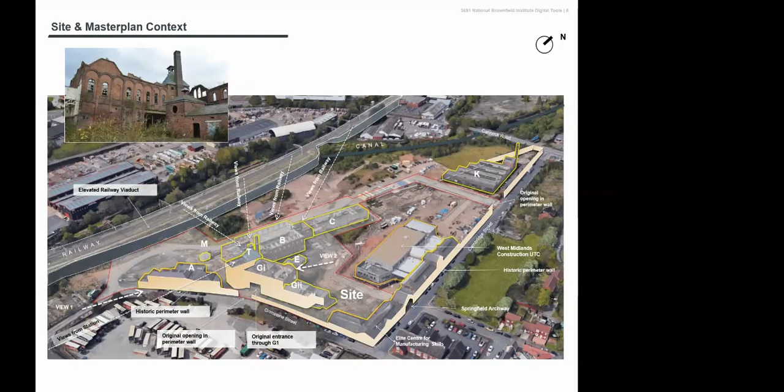Some attempts at redevelopment of the site prior to the university purchasing it had also created some issues which we had to overcome and manage. But this is the next phase in the development of the site overall by the university. There was the University Technical College on site, the ECMS - the Engineering Centre for Manufacturing Skills - which was one of the previous schemes that reused the stable blocks, and then we've got the Elite Centre for Manufacturing Skills, and then the School of Architecture and the Built Environment was the latest project to kick off prior to the NBI.

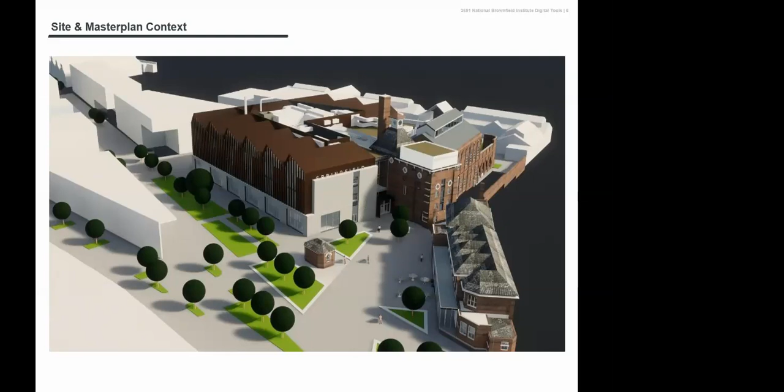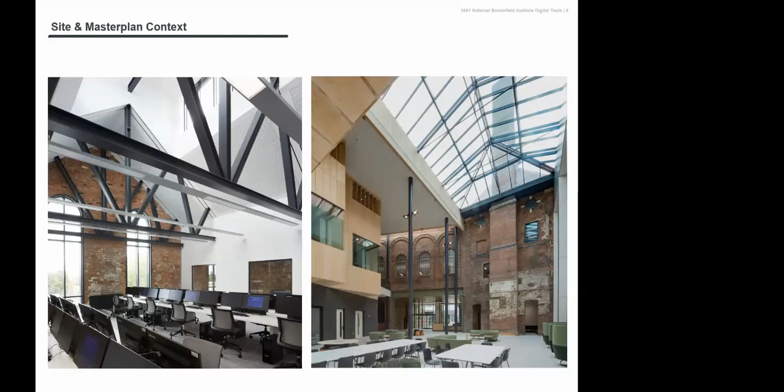The team got very familiar with the site and the constraints therein, having delivered the School of Architecture, which is immediately adjacent to the NBI site. From that came the reality of the school, breathing new life into those existing buildings, which are a landmark within Wolverhampton. We needed to make sure we were celebrating the existing buildings and the historic content of the site.

In considering the NBI building in its own right and the site selection for it, we had to make sure we were tying into the overall master plan, and the site was chosen to reflect and respect the previous historic line. There were old railway sidings that used to pass through the site, one of the focal points within the site master plan, maintaining that central corridor where the railway lines went and utilising the space on either side of that for the developments.

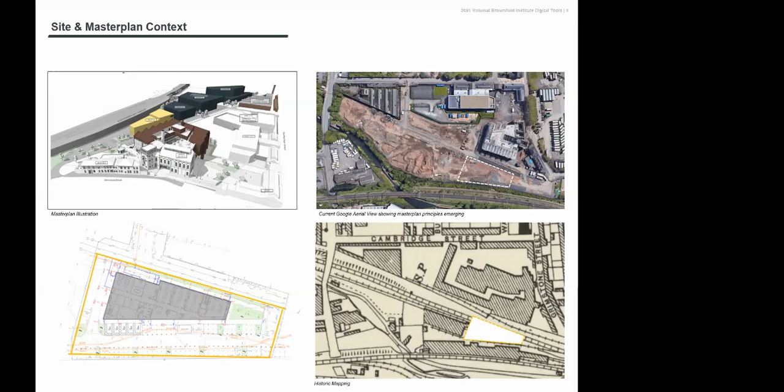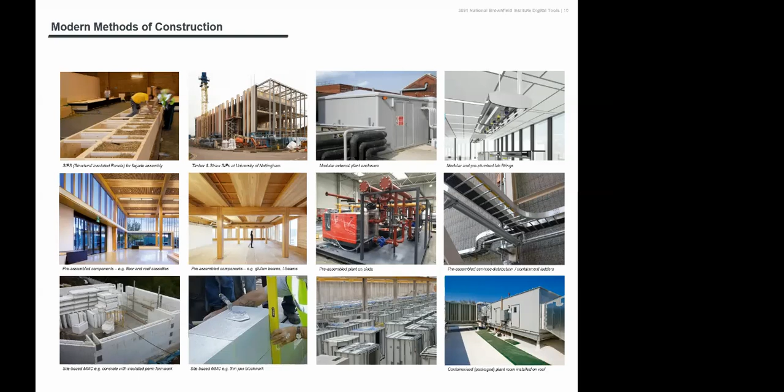As part of the brief, one of the key aspects we were looking at was the incorporation of modern methods of construction. In such an accelerated program, there was only so many things we could consider, but we tried to ensure we picked up all possible avenues for modern methods of construction, componentized construction, and to make sure we had a sustainable delivery process in place.

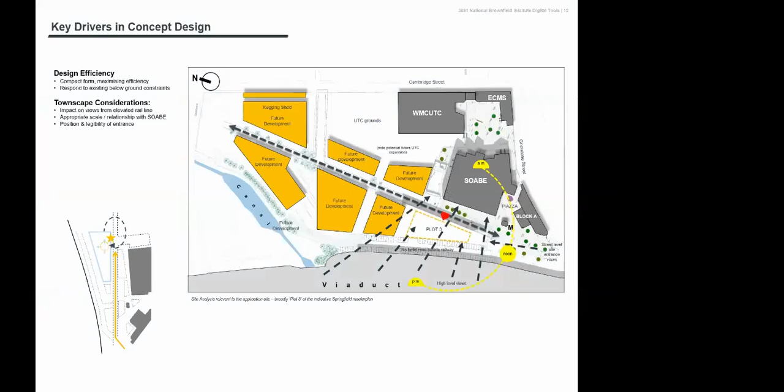I'll now hand you over to Joe, who will be able to talk you through some of the plot developments in terms of how the scheme developed from that point onwards. Thank you, Simon. Good afternoon everybody, I'm Joe Belcher from Associated Architects. It's really good to be able to join you today.

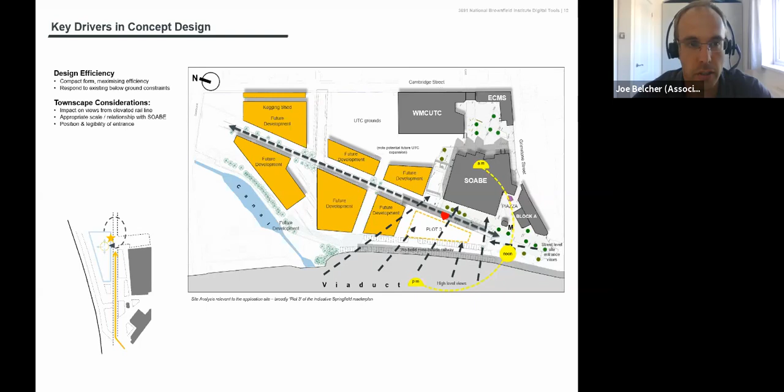So the key drivers in the concept design were really twofold. There's a big emphasis on design efficiency, delivered through a compact building form, maximising the usable space for the budget, in terms of below ground constraints, and then also townscape issues of how to deliver a building in close proximity to the historic context.

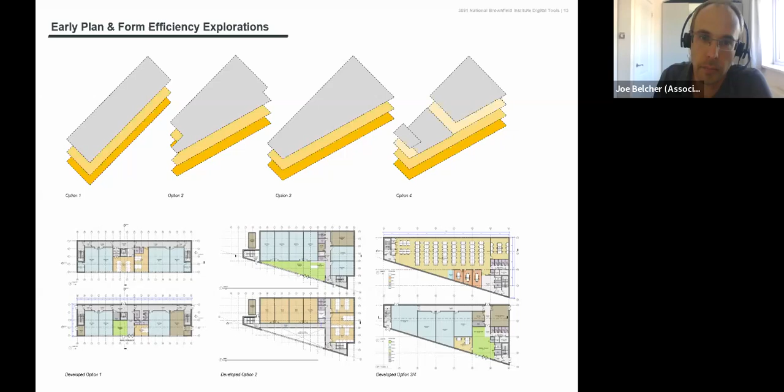We delivered a quick but wide-ranging options appraisal, different plan forms, considering volumetric modular approaches and different footprints to the site using the 3D models available, as you can see here, and settled on a wedge form construction. If you just flip the next slide, Simon, that'd be great.

All the way through that process, we were able to use the models to undertake real-time analysis of the impacts of each of those on the net areas available and compare that to briefing requirements.

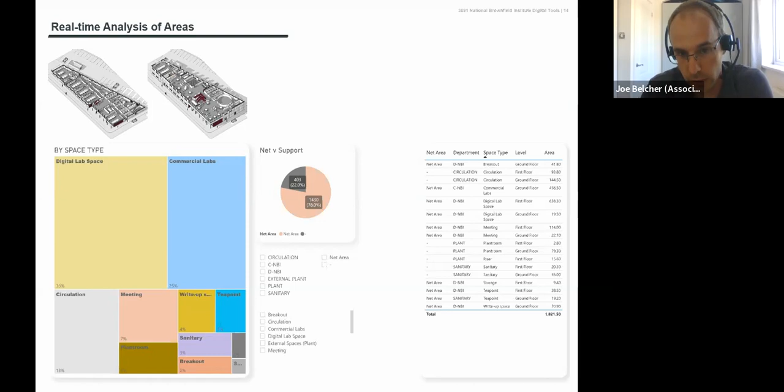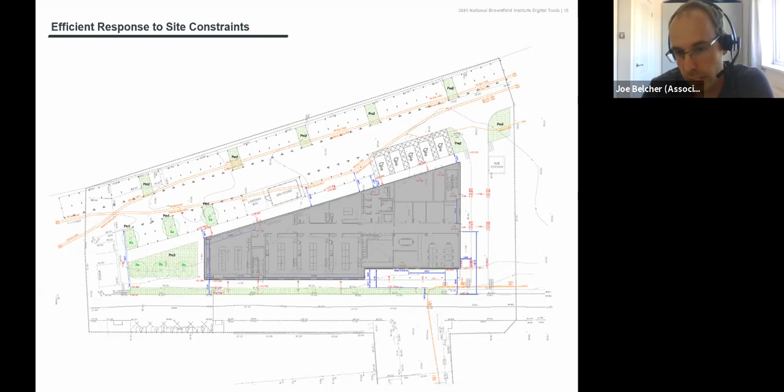As I mentioned, it was really key that there was an efficient response to the below ground constraints. Simon mentioned some of those issues. There'd been a remediation process undertaken already, so we were keen to minimise removal of material from the site, and also there's a number of HV cables as well as other LV and data cables on the site. So the development of the plot and its levels was all driven by that.

We were able to test a number of townscape concerns, the views from the railway viaduct adjacent to the site, and also the relationship with the SOAB building, shown on the bottom right hand side with the sawtooth roof that we'd recently completed.

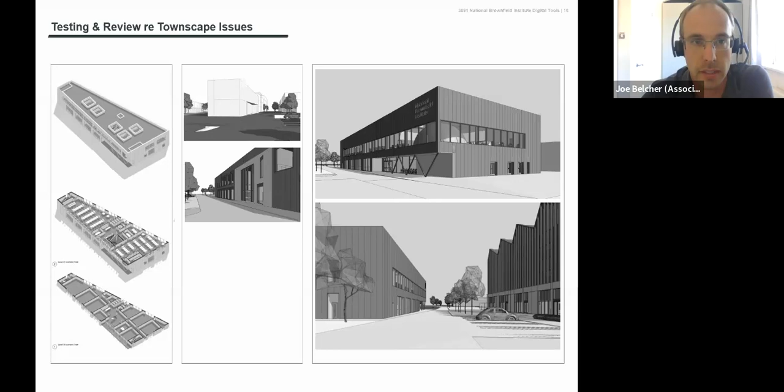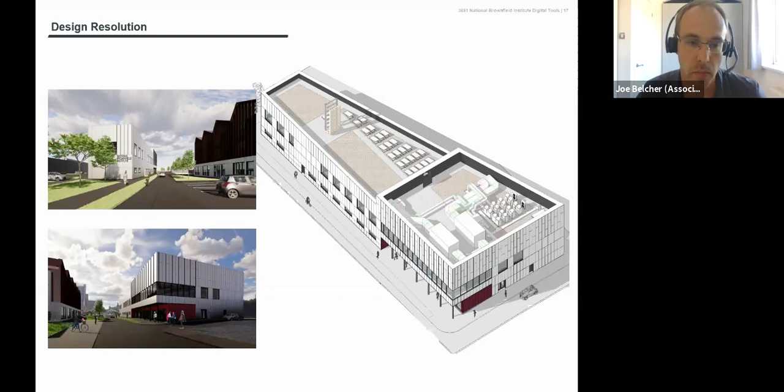So here you can see the design resolution, really how it has ended up. It's a relatively simple form, a wedge shape, two-story building with a protruding section at the far northern end, which accommodates a plant screened area and also helps to emphasize the entrance end of the building, helping to draw people further into the master plan site as it gets developed through the future.

Using all the digital design tools available to us has been really important to enable collaboration amongst the whole design team to get us to work to this aggressive delivery program that Simon alluded to. And it's really important to mention that the key to all of this is healthy models, reliable models producing reliable design information.

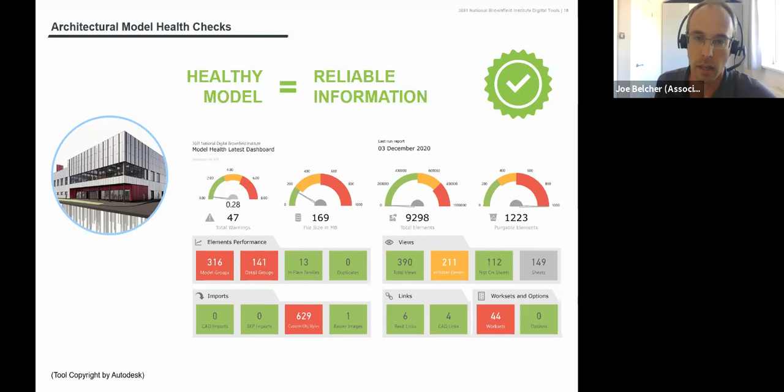So we conduct regular model health checks. We're serving as architects, lead designers, and BIM lead coordinators in this project. So it's been great to work together as a team on this.

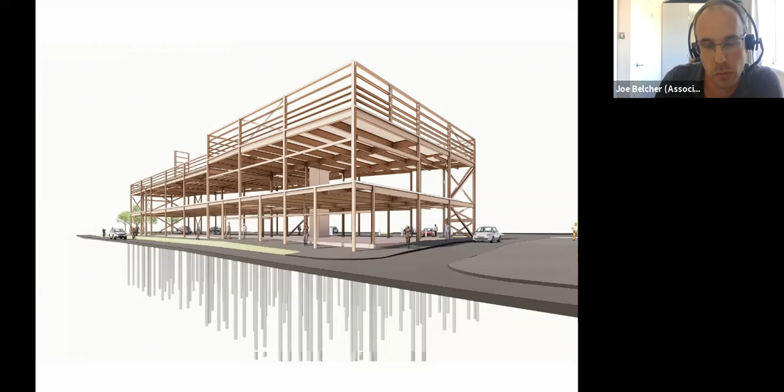This is kind of what we began as a core design team with landscape, civil structures, and ourselves, and MEP has now been progressed through the site delivery stage.

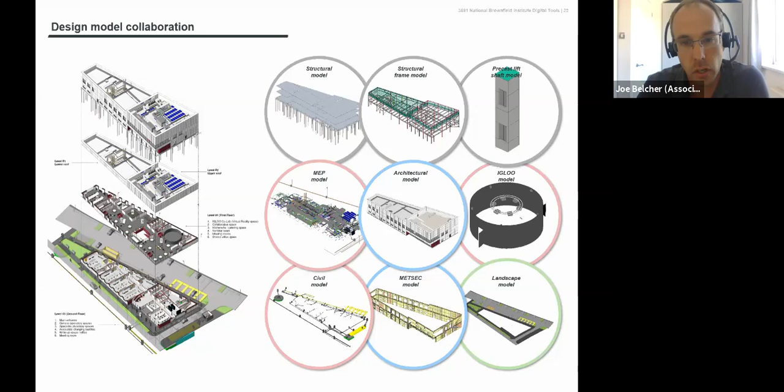We're now a few months into site stage work, and we're integrating the models of specialist subcontractors, for example the steel frame, light steel frame SFS systems, and structural staircases and the like.

So it's a process which is continuing, and that's really important to ensure that all the advantages generated early on are maintained in terms of coordination and smooth delivery on site. We're using a tool called BIM Collab to enable collaborative review and recording and addressing of coordination issues, illustrated in this slide as a sort of thumbnail summary.

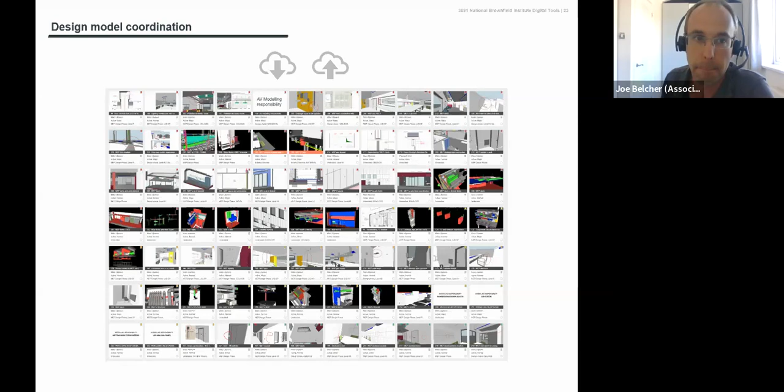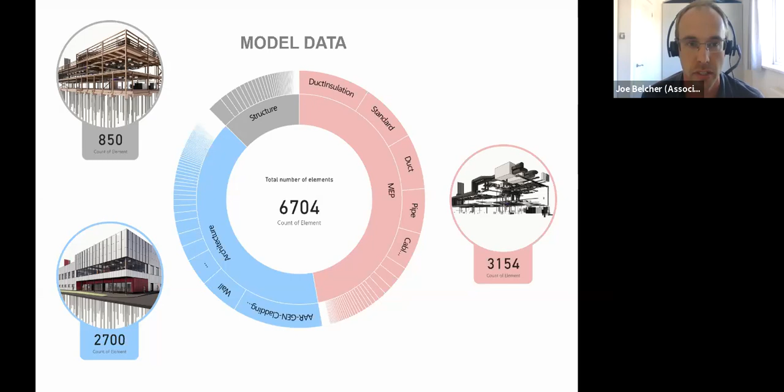So there you see this, the complexity of the various models. That's just the three main models from the core design team at an earlier stage of the process.

So external envelope, as I mentioned, is an aluminium rain screen cladding system, which we developed to meet all the requirements for cost and appearance on the site. It's a generally silver appearance with some feature areas in a deep red wine kind of colour, picking up on existing textures and colours on the site.

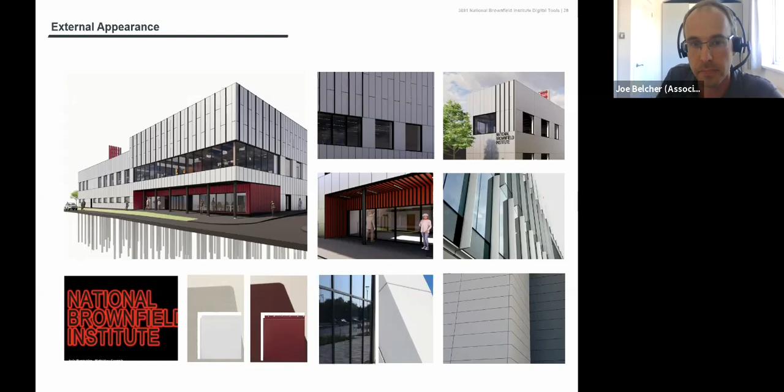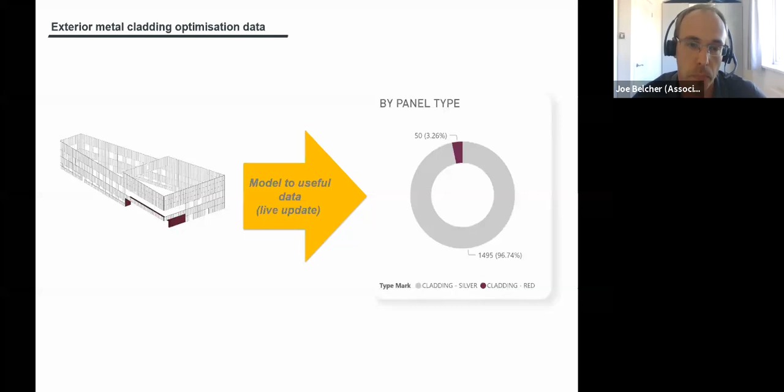And obviously, as well as traditional 2D outputs from the model, behind that there was a lot of extensive use of the model. If you see on the next slide, Simon, where we could do processes optimizing cladding panels, for instance.

So here you can see we ran some simple analysis saying, well, you can see that we've really driven it down across the whole cladding panel system. The vast majority of them, 75%, are the same width, 750mm modules. Very few deviate from that, at corners and the like. So we can use the model to really drive design optimization, demonstrated by this example.

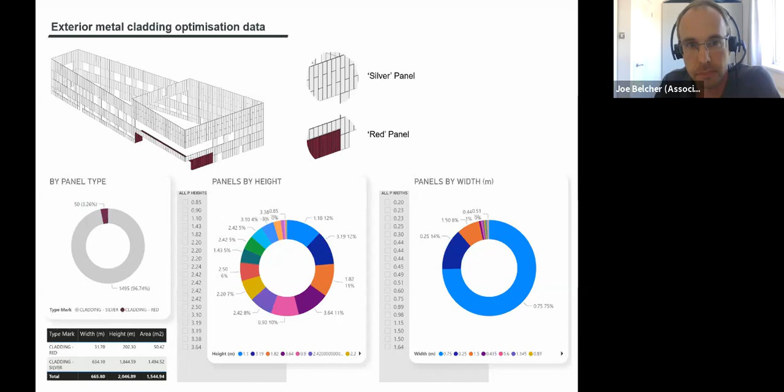Next one. Next slide, please. There we go.

And a similar process was undertaken through optimization of the glazing on the building as well. It was a clear client directive to really focus the glazing areas, and we were able to demonstrate the processes we were going through in iterations of the design, using the model to generate quick and accurate estimates of that.

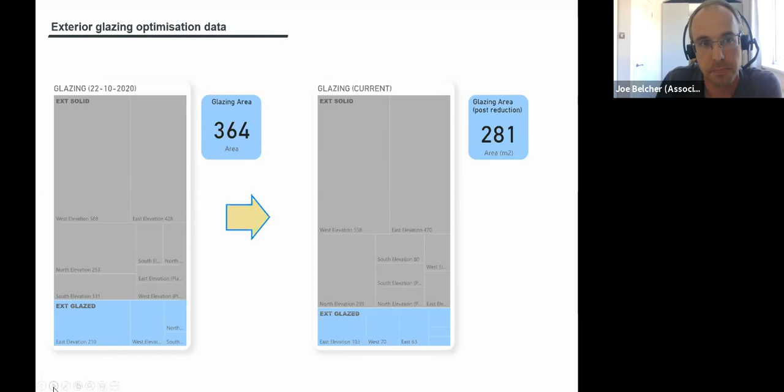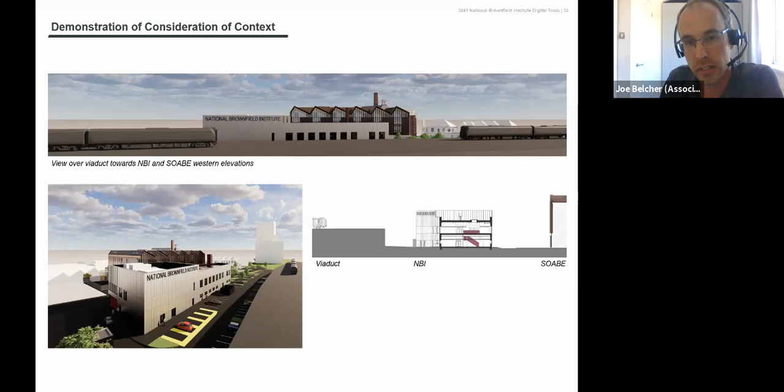So here you can see some demonstrations we produced of the scale and how it relates, the views from the viaduct, and the relationship with that sawtooth roof of the SOABE building recently completed. Okay, if we just flick through these.

So moving to the internal arrangement, as I mentioned, it's a simple two-storey building. You can see the plant on the roof to the right-hand side there. And the ground floor, I'm going to talk through first.

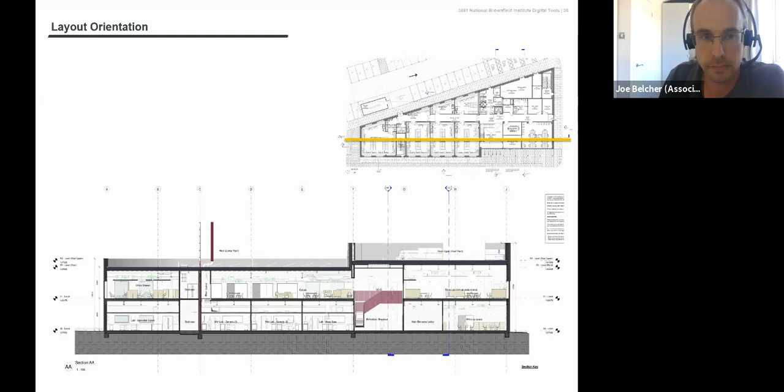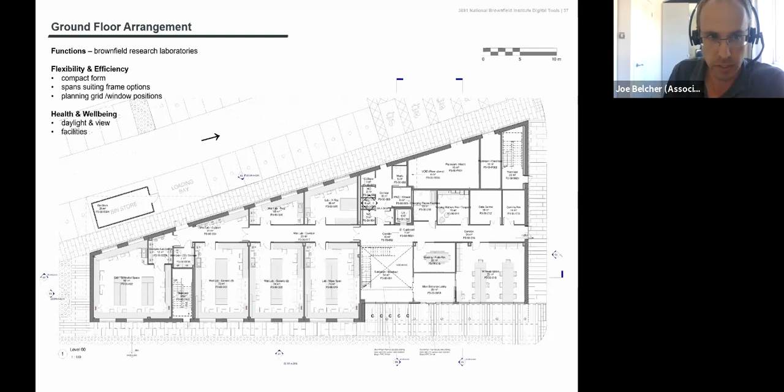The labs are all clustered in an efficient group together at the top end of the page there. The entrance towards the middle, and some admin areas right up on the front corner, with core and plant areas, data center, etc., tucked in the corner there as well.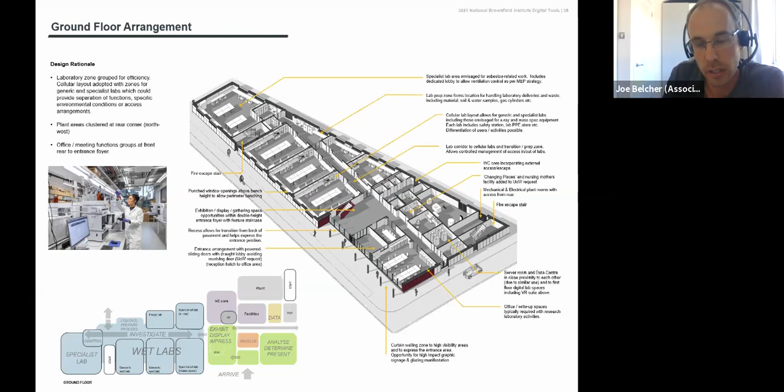So within the laboratory zone, the requirement is a space available for external commercial partners to come and take space, or to collaborate with the university on research into issues related to brownfield sites and contamination of various kinds. So there are different labs intended to focus on different types of contamination and site issues, such as asbestos or various organic materials, metals, and others.

And there's a range of prep spaces there. So it's a cellular arrangement rather than open plan, which supports various alternative uses of the spaces by different users for different functions, adaptations over time, and specialist environmental conditions in particular labs, which wouldn't be available if it was a single open plan space.

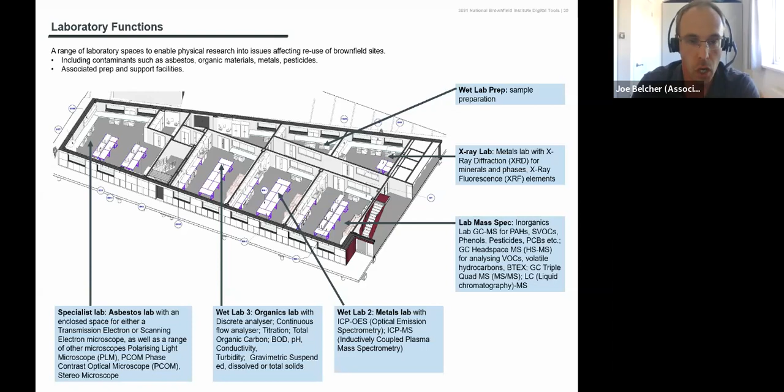So the next few slides just take us through some simple visuals to give you a flavour of the spaces available. Oops, there we go.

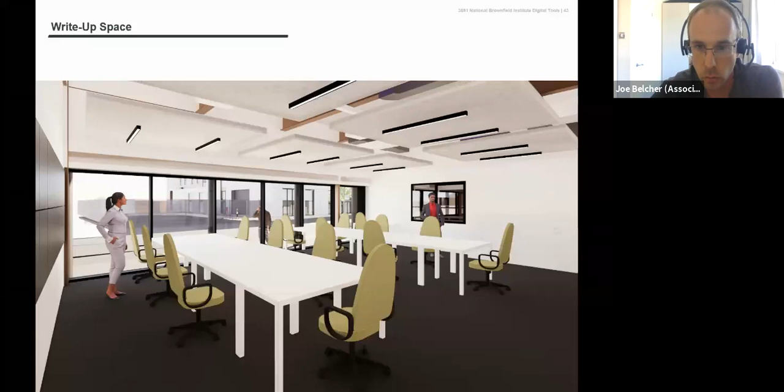This is a write-up office that's associated with the laboratory spaces, and an office area, meeting room.

Very early on, we developed ourselves a laboratory fit-out model. So it's all considered from an early stage, which really helped the client to understand what it is that we're proposing, what they're getting, and refine that, and also deliver really accurate tender information that could be accurately priced.

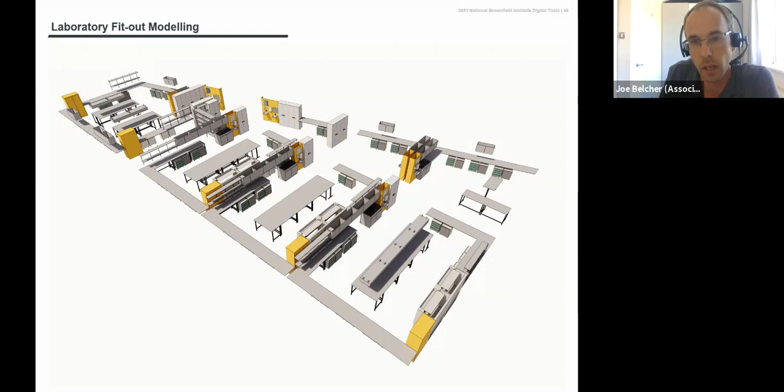And you'll see the schedules linked to NBS and all the rest that we have on the next couple of pages. And here demonstrate the coordination between the structure, the fabric, and the services, which is really crucial on these heavily serviced lab areas.

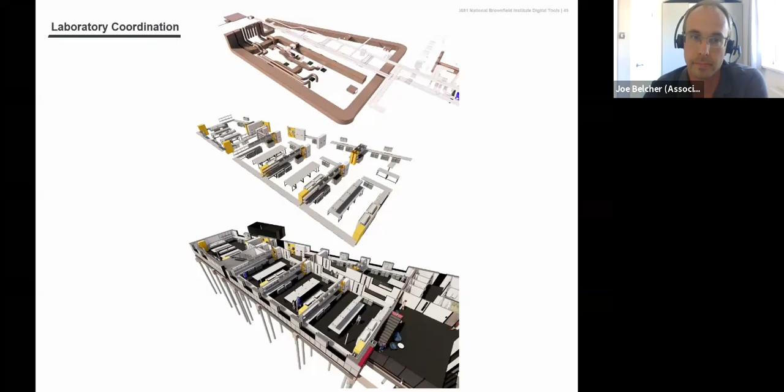So the 3D model, the layouts, the quantities, the specification, all linked together through the 3D model. Likewise we can optimize the design and keep a clear track on the data, the quantities of various kinds of provision, worktop areas and stuff like that, through the iterations of the design.

Just to reinforce as well, Joe, obviously we'd been driven specifically to get early contractor engagement on here to be able to deliver the project in the timescales and time frame we had. And obviously it was really important to get their buy-in and support in making sure we provided the right sort of information in the right format for them, and to get the support of their supply chain through this as well. Yeah, that's right. Thank you, Simon.

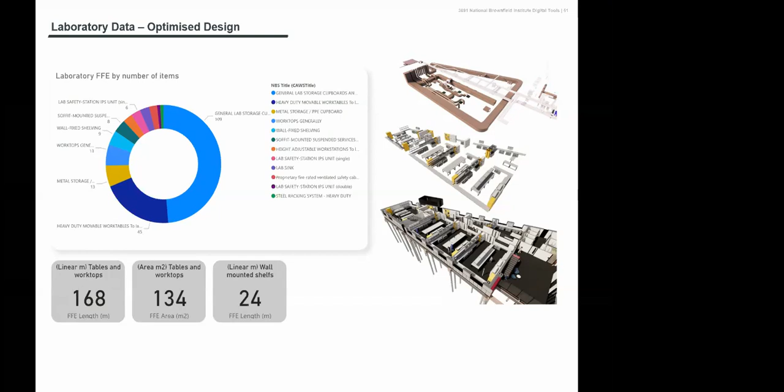Yeah. Okay, next slide, please.

Okay, so we're going to move up to the first floor now. And the function of this space is really a digitally enabled collaborative work area. The university intend to run professional training events, CPDs and that kind of thing, but also for the space to be used by project teams to be able to come and plan and develop their project proposals for the reuse of brownfield sites.

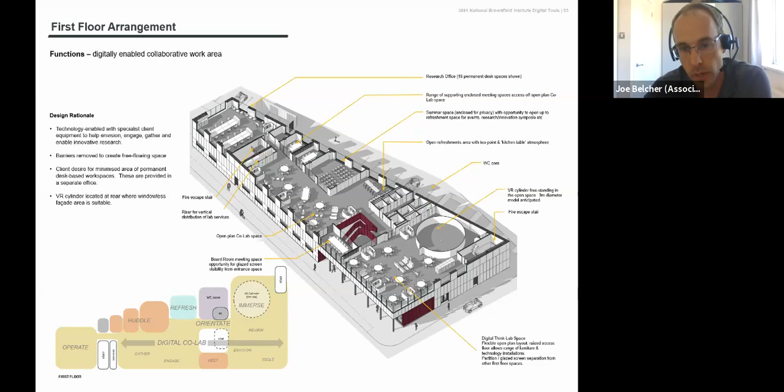So it's very technology enabled through its fit out, and a key flagship element is this 360-degree immersive cylinder, where there's projection on all sides, which we'll see in some later slides, where project teams could come and view and review various sites linked with various below ground survey data, record information of contamination, of below ground conditions.

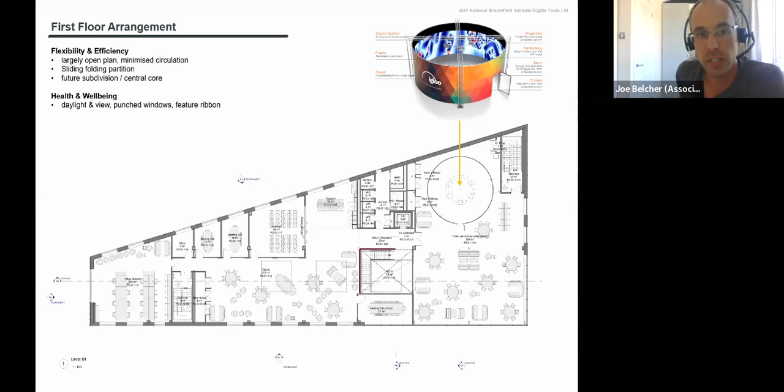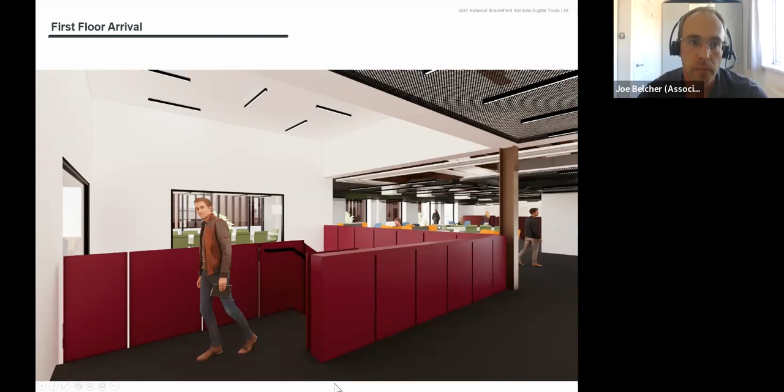Various issues related to constraints really that may have held back brownfield redevelopment previously. The idea is that within this space, in a suite of spaces, new solutions and development opportunities will be unlocked. So flexibility and efficiency, again, key things, health and well-being in terms of daylight and views. So the next few slides again show some visuals of the kind of space.

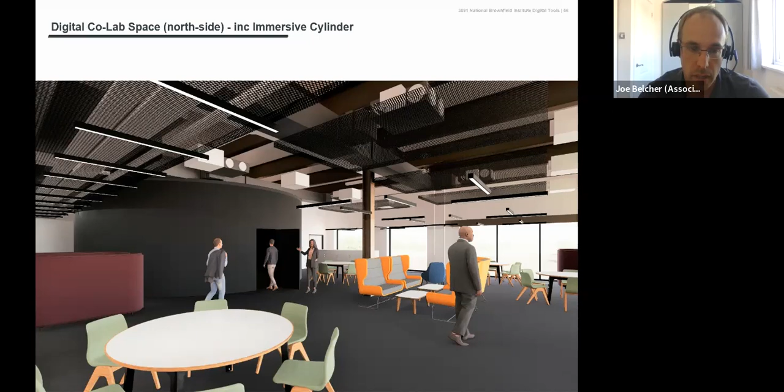This is the arrival up from the ground floor, and this is the 3D 360-degree immersive cylinder externally sitting within the space, and the kind of facility that might be on the inside. Obviously any number of things could be projected on those surfaces, combining data and visual imagery.

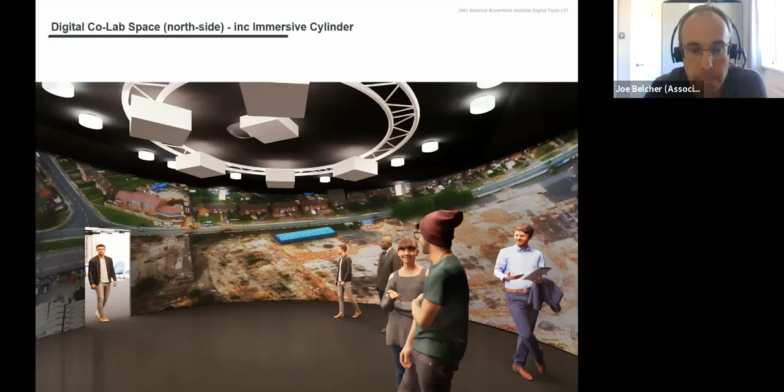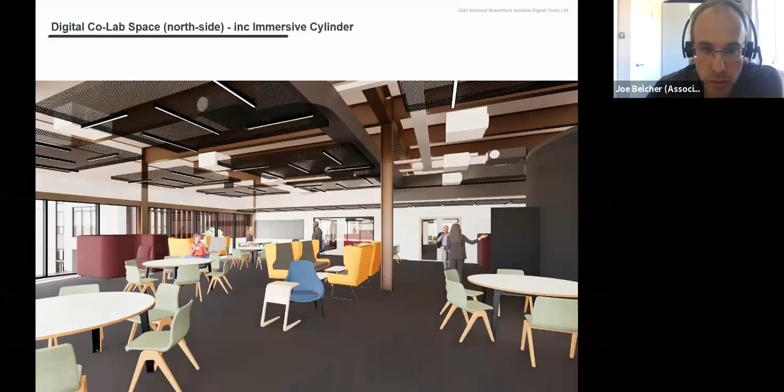So outside of that space are the wider sort of collaborative spaces, where breakout opportunities from that main internal cylinder would take place. And over the other side of the building, there is a tea point refreshments area and further open plan breakout spaces.

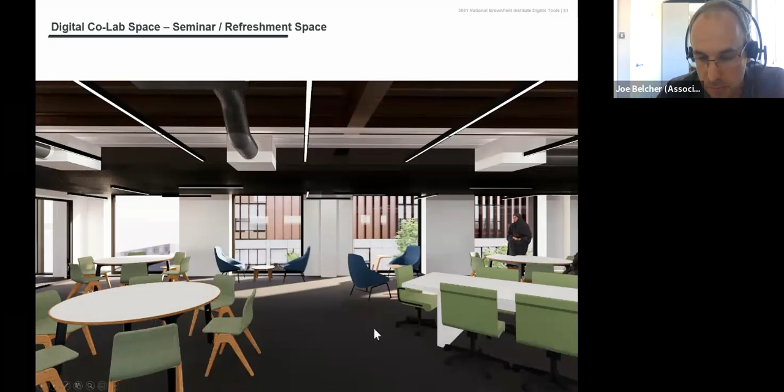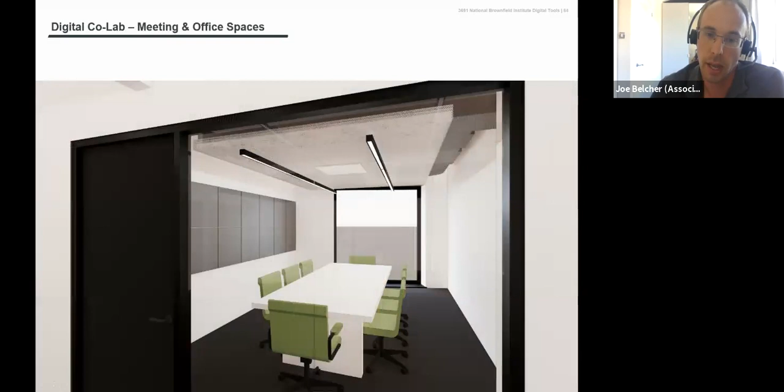Lots of flexibility in how these are used. There's a kind of boardroom style meeting room, a range of seminar spaces, meeting rooms, and also an office for the regular workers within the space as well.

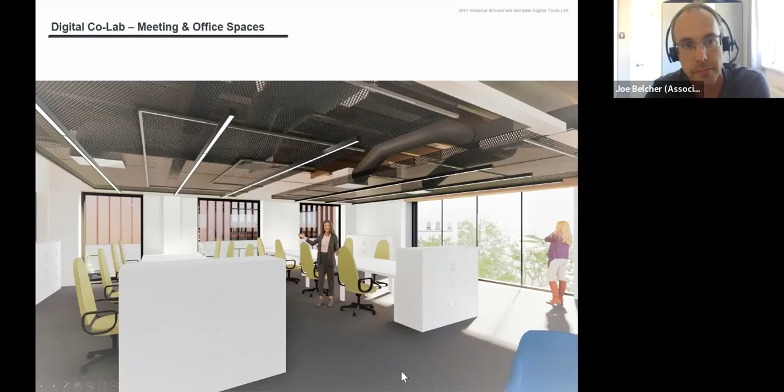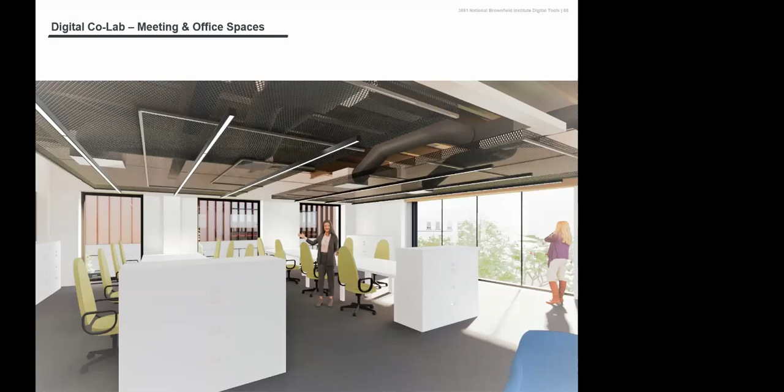Yeah, I mean, the key focus for this was around, again, collaboration. It's allowing bookable space for the wider community as well as the university to use. So any visiting professors, any visiting researchers. So the whole space was driven around having flexibility and collaboration at its heart.

So sorry about the interruptions. I have to quickly take myself off mute to be able to interject. No, that's good. Back to yourself. Okay.

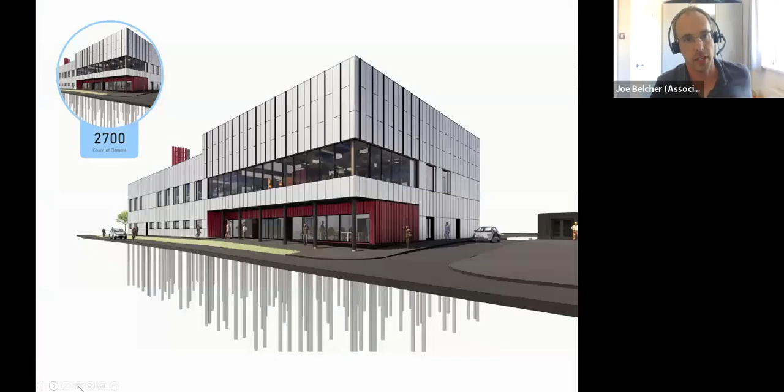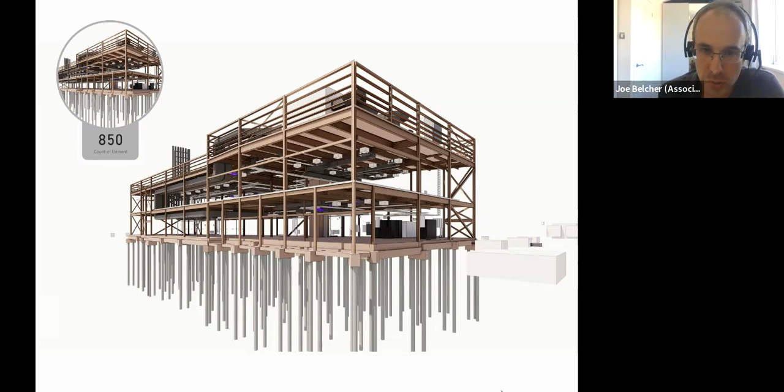Okay, so next few slides just demonstrate, as you've probably got a flavour of, the holistic approach we're able to take to architecture, structure and services. So here's the architectural wrap to the building, sort of 2,700 components within the model at that point. The structural frame and piling is 850 elements within that model at that particular point in time.

You see the piles there, and next you see the services, obviously very heavy on the modelled elements there with the complexity of the MEP systems. And then all together. So I'm going to hand over to Dan Maddy from Atkins to talk through the structural and civils approach to the scheme.

Yeah, thanks, Joe. Hi, everybody. My name's Dan Maddy. I'm from Atkins. I'm a structural engineer, and I led the civil and structural design on the NBI project. So I'll just talk for a couple of minutes about our general approach.

As you can see from the slide, structurally it was quite a straightforward structure, but we really spent a lot of time and focus on optimizing it. And due to the aggressive programme, it was all about coordination and collaboration and getting the design completed as quickly as and efficiently as possible. So yeah, just a few minutes talking about the civils to begin with.

So if you go on to the next slide, please, Simon, or whoever's driving. So we started off with the drainage. So the slide before this one, please. It's got the surface modelled. Yeah, there you go.

So we modelled the drainage at an early stage to make sure that was in line with the existing site-wide infrastructure that was installed as part of the master plan. A lot of the site-wide drainage and attenuation was already in, and we had to tie into that.

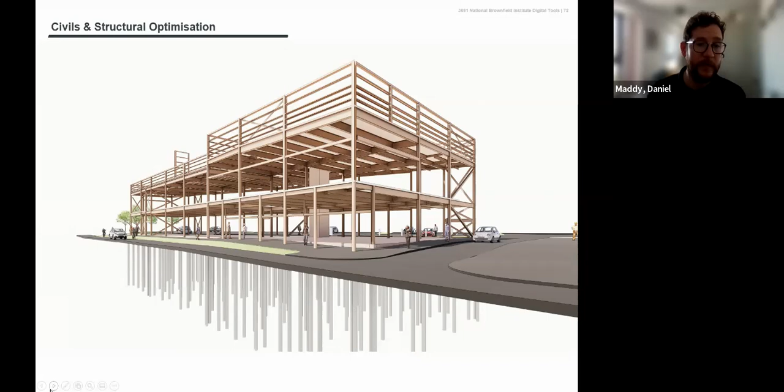We've got some SUDS elements on the scheme. We've got permeable paving in the car park, which provides some water treatment and further reduces the need for attenuation tanks. Another advantage was that it reduced the amount of dig required in the car park, where we've got the high voltage cables that Joe mentioned earlier. So yeah, that's about it on the civils.

Moving on to the structures, again modelled in 3D. With the surfacing, this allowed us to really optimize the level of the pile caps and substructure. As you can see in this model, the pile caps and ground beams aren't all at the same level. We've really responded to the proposed external levels to minimize the amount of excavation and minimize the amount of sacrificial additional piles and the trimming of the piles.

We've got two different piling mats to really optimize the amount of imported and exported material on the site. In terms of the superstructure, as Simon mentioned earlier, one of the huge factors on this project was the very aggressive programme and getting to site as quickly as possible to meet various funding targets, and that had a large impact on the structural solution.

There was a large appetite early on to investigate and showcase modern methods of construction, such as modular, which we looked into quite a lot. But we were also conscious as a design team that we didn't want to crowbar those solutions in just for the sake of it. We wanted to take a pragmatic approach, as we would on any brownfield project, and use the most appropriate solution. With all projects being different, on this project, programme was king.

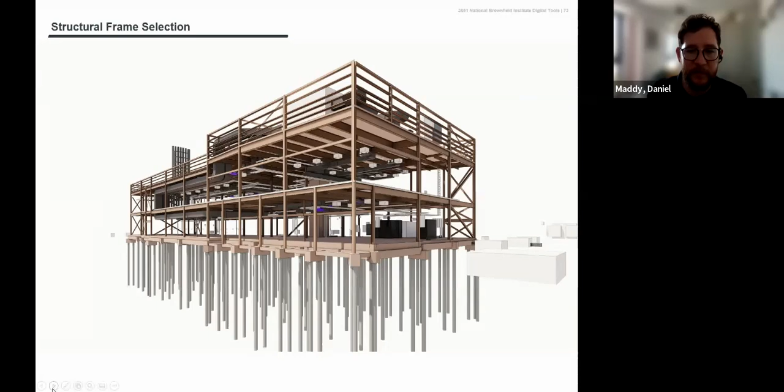In terms of the floor construction, that was really developed to suit the MEP. As Joe mentioned, it's quite a heavily serviced building with the labs and so on. So we considered several options, including composite precast solutions and cellular beams. But the option that provided the minimal combined structural and MEP depth, and the greatest flexibility for MEP both now and in the future, was a composite solution with relatively closely spaced secondary beams that kept everything nice and shallow.

As you can see on screen, this allowed the MEP to pass underneath while keeping the overall depths minimal. We've got the same construction on the upper roof, which is also acting as a plant deck, but there's no significant plant on the lower roof, so we were able to keep that nice and lightweight using cold rolled purlins to reduce overall steel tonnage.

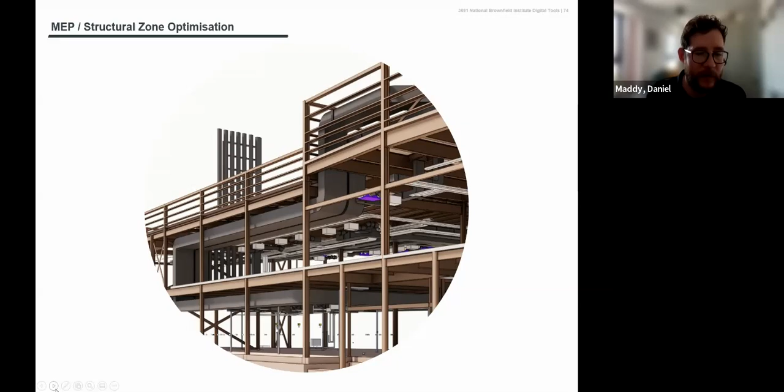As we can see on screen, we coordinated very closely with MEP to size and position all of the openings required for the ductwork and make sure there were no clashes when we got to site. As well as openings, we made sure that all of our primary beams, and where we've got changes in roof level, weren't going to block any routes and cause clashes. We had regular model shares, sharing the model every week at the peak of the design process, keeping up to date with the models and running regular clash reports to make sure everything was working as it should.

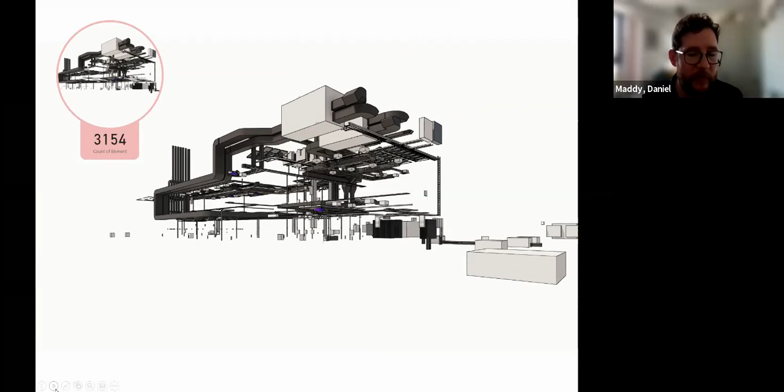So yeah, that's about it really. As mentioned by the other members of the team, close collaboration was really key on this project. We were able to get from feasibility stage in August of last year to a start on site in February, which is a testament to the value and effectiveness of that BIM approach and the regular model sharing. So from that point of view, it's been a great success, and so far, touch wood, everything's going really well on site. I was out on site a couple of weeks ago, and it's progressing at a rapid pace.

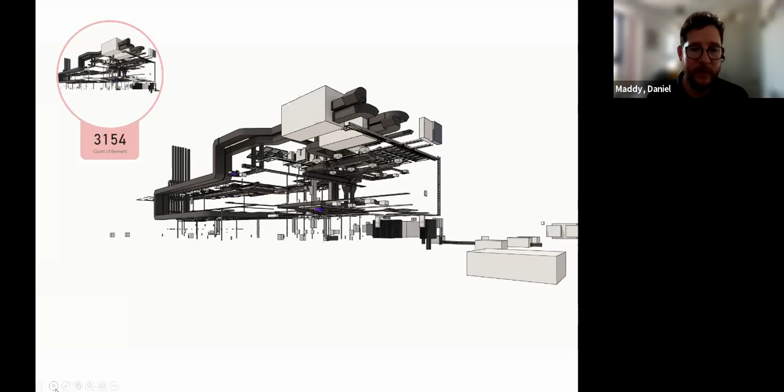So I'm now going to pass over to Antonios of Couch Perry Wilkes to talk about the MEP approach and how that fit into the overall design. So over to you, Antonios. Thank you, Dan, and good afternoon all of you. My name is Antonios Agapakis from CPW. We're mechanical electrical consultants working alongside the rest of the team from inception all the way to construction stages.

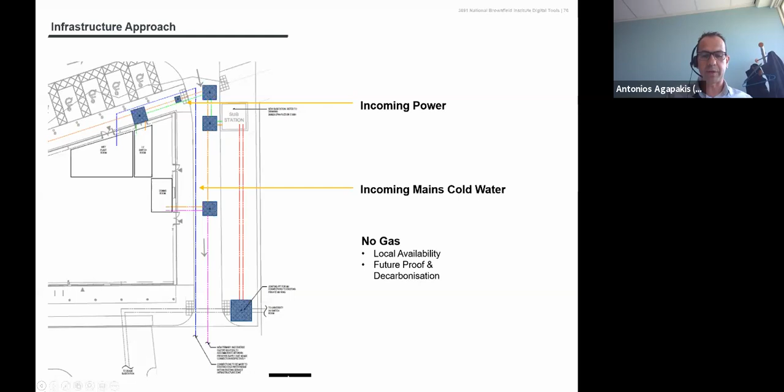As part of our energy and sustainability approach, we reviewed the infrastructure of the building. We connected into the local utility services providers for incoming power and mains cold water, and to future-proof the building in line with the government's carbon reduction and the university's carbon reduction plan and grid decarbonization, we have no mains gas supply into the building and no traditional boilers for heating and hot water. We're using something future-proofing as far as the building's concerned, which will be air source heat pumps. It's something that's out there and available, and the government is really pushing hard as far as grid decarbonization is concerned and the carbon reduction plan.

Similarly, our sustainability approach and the low carbon roadmap for the building design, in collaboration with the rest of the team, especially on the architectural front with the building orientation, was to optimize the location of the building, the glazing percentage of the building, to ensure a very good thermal envelope, daylighting into the building in various areas, and more importantly, that the services designed to serve the building were in line with the program, in line with the very important cost, but the running cost of the building, which is more important for the years to come.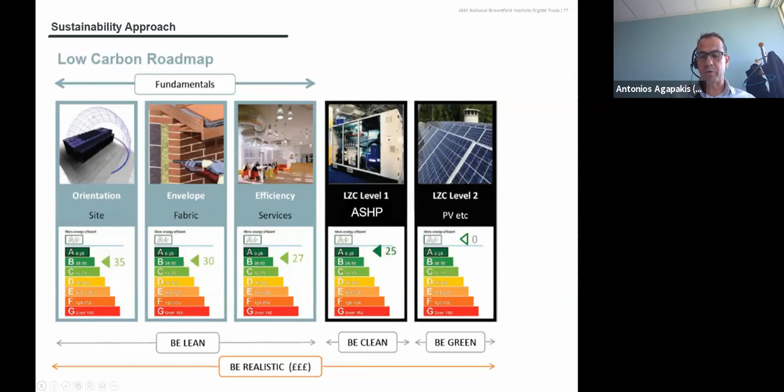Now, to give us all the credentials as far as clean and green energy is concerned, air source heat pumps have been incorporated for the low zero carbon solution, in line with photovoltaics on the roof, to give us the EPC that we required.

Innovations for the building - we did touch earlier on the modularization, and we did test all the services on the roof space and the offsite manufacturing facilities to ensure that they can be delivered on site in modules and installed in line with the program. The photovoltaics are very important for their installation, and in line with the renewable energy contribution for the local planning policies, will give us the credentials we need as far as decarbonization is concerned.

With the labs and the rest of the offices, the building is fully mechanically ventilated, so we have ensured that the heat recovery through the ventilation plant will give us that extra energy saving that we need, not just as an installation, but more importantly, as a long-term operation of the building. The air source heat pumps on the roof space will ensure that decarbonization of the grid forms part of this building for the long term, and it's in line with the local policies as well.

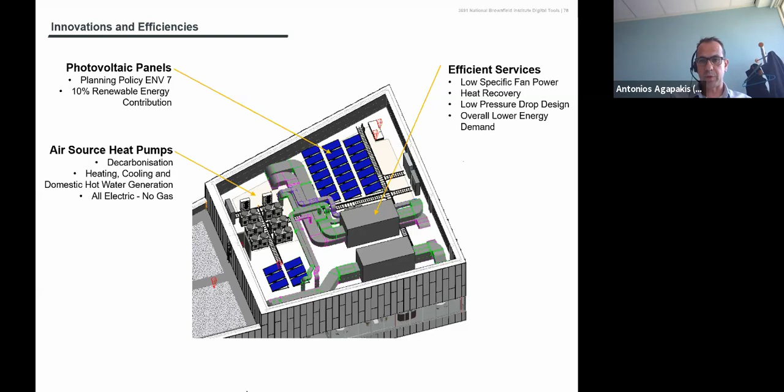I think overall, you can see the plant, and we're trying to accommodate everything in one place, and it works really well on site at the moment. Over to you, Simon. Thank you very much.

Yeah, no, thank you very much, Antonios. The whole collaborative approach has fed through the entire process, as we've said, but to ensure there was absolute consistency and that the university's approach was aligned to all of the key deliverables and outputs, the university felt it was really important to put a bit of challenge back into the team as well. The existing team that started all the pre-contract work had migrated across from a previous project, the same contractor as well, so it was really important to get some challenge in there and ensure there was some proper rigour put into the post-contract process. And that's when Mace were introduced as project managers to deliver the post-contract period. I'll hand over now to Jack to explain that to you.

Thanks very much, Simon, and good afternoon all. I'm Jack Duthie from Mace, and as Simon just alluded to, we were appointed as the NEC project managers for the construction period of the NBI. The form of contract used was the NEC ECC Option A. Simon, if I could just ask you to click on to bring up the text.

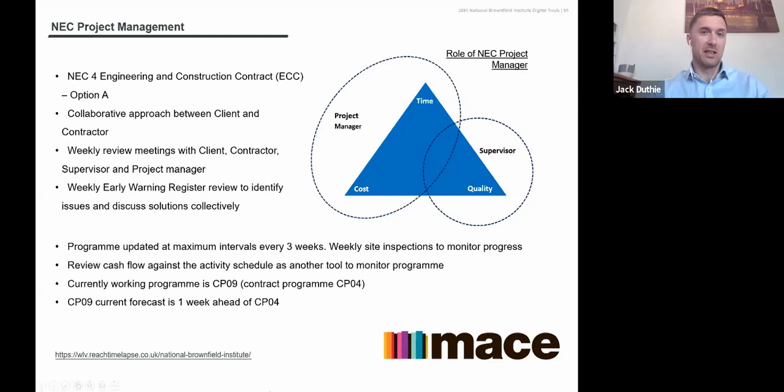And I think, Simon, if we're able to click onto the time lapse, we can take a brief overview of the construction activities to date.

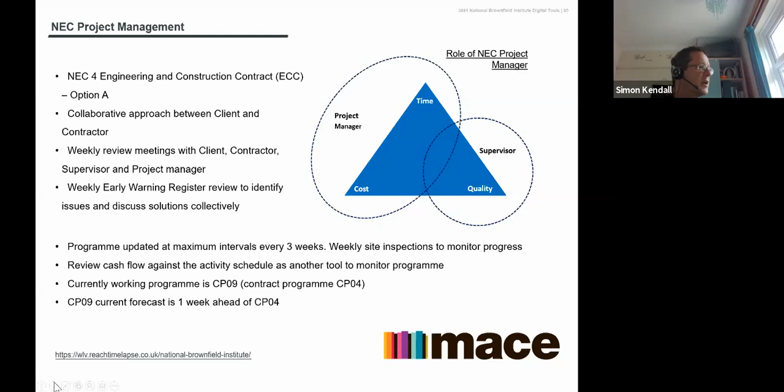Sorry, Jack, I did try sorting that through prior to the start of the meeting, and I found that it was too much for my bandwidth on my Wi-Fi. I think it ended up with really poor quality. So what I've done is I've just included a slide which shows the model project against some progress photographs, and hopefully you can describe some of the progress we've made through those.

Top left you can see the artistic illustration of the finished project with SoABE on the right and the new NBI to the left. The photograph looks up the spine road that Joe mentioned, reflecting the previous use of the site as railway sidings. Top right, you can clearly see the steel frame in position. Not sure if the slabs are shown on that photo, but both slabs are poured, as you can see by the photo below. The activities on site include the SFS and external hard standing, the majority of which is installed to give the contractor a good working platform to complete the job. Roofing has started this week, reflecting the updates from the revised programmes, showing the project is in a really good position moving forward, and we hope to maintain that for the duration of the project.

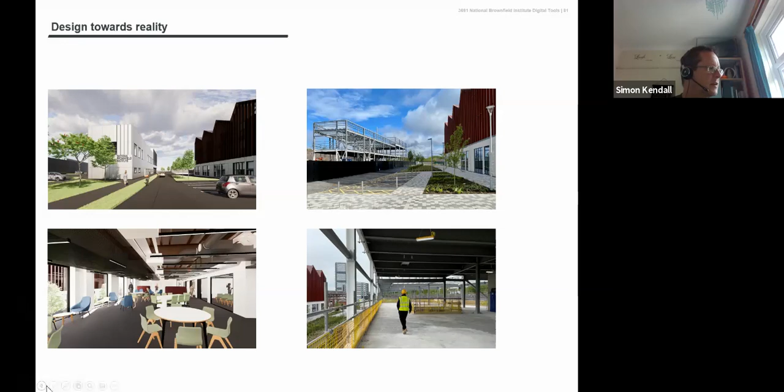So thanks very much, and Simon, I don't know, perhaps we might be able to share the link to the time lapse via an alternative route for those that are interested. Yeah, hopefully we can. We'd obviously just need to get authority from the university to share that. If I stop sharing my screen, well, in fact I'll show you why. I'll stop sharing now. That's great. Thank you very much, Jack.